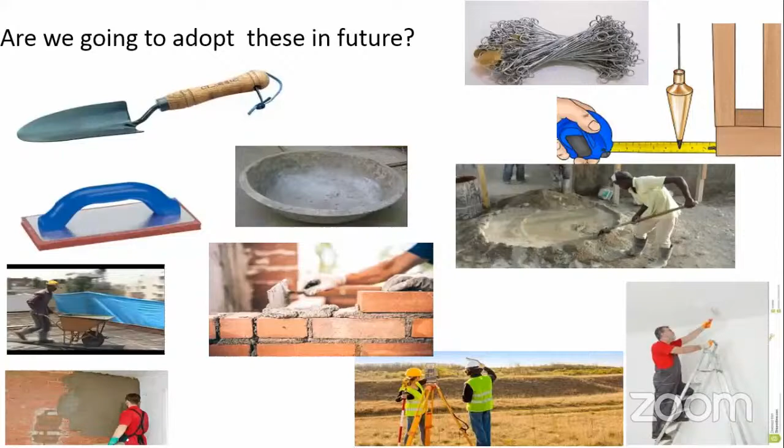If this is the scenario, then what about the construction industry in future? Whether we are going to deal with the same things, like mixing concrete with the pan and bringing the trolley to the site and transporting materials to the site, everything - whether we continue with this traditional method of construction, or we are going to have digitalization. So definitely we have to go with digital construction.

So why we have to go for digital construction is that it is faster and cheaper, because nowadays customer expectation is that everything they need at their place at a very fast rate. So if you are starting a construction by estimating that - normally the problem with the construction industry is the contractor or the consulting civil engineer will tell you this much is the estimate, but definitely we cannot finish the project within that estimation.

Another thing is we will tell them I will complete this project within 6 months, but definitely we are not able to complete it within 6 months. These two are the main drawbacks in the construction industry, for many reasons. But if customers are expecting the project to be completed very fast and also at a cheaper rate, then we have to think of some new technologies. So that is where digital construction has come in.

So it will be faster, cheaper, proactive, collaboration is possible, automation is possible, and real-time communication - all these 5 things can be obtained through digital construction.

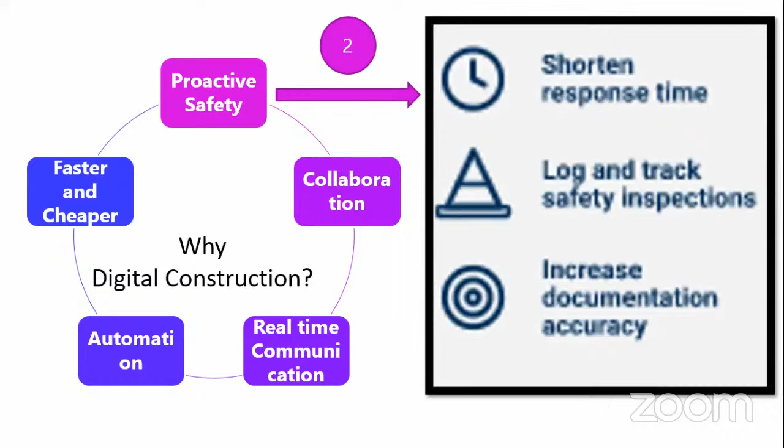And proactive safety, the second one, which will shorten the response time, track safety inspections, and increase documentation accuracy.

Next is collaboration. We can have real-time collaboration digitally. We can punch lists, improve quality control, and collect data. So there's no need of waiting to get a signature from a higher official or immediate higher authority - now digital signature is possible, so that immediately we get approval and can go ahead accordingly.

And then it is automation. So we can automate tasks and actions, update field workers, and track the data, everything. And the 5th one is real-time communication, which means we can communicate very fast.

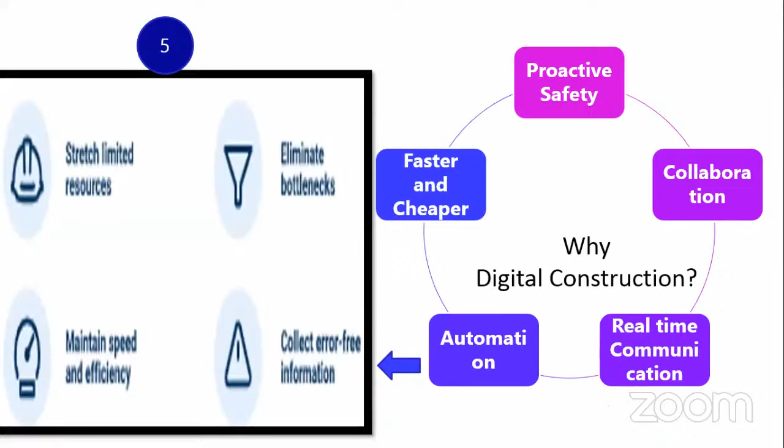And I will explain you in BIM technology. I think already somebody have explained about that, how that team spirit will come and networking is possible with the latest technology. In future slides, I will explain.

So the digital culture has come in all the industries. Only the production and construction industry, it is a slow process, but anyway, we will get it very fast. So the recent technology trends in construction is building information modeling. I think already somebody have done this.

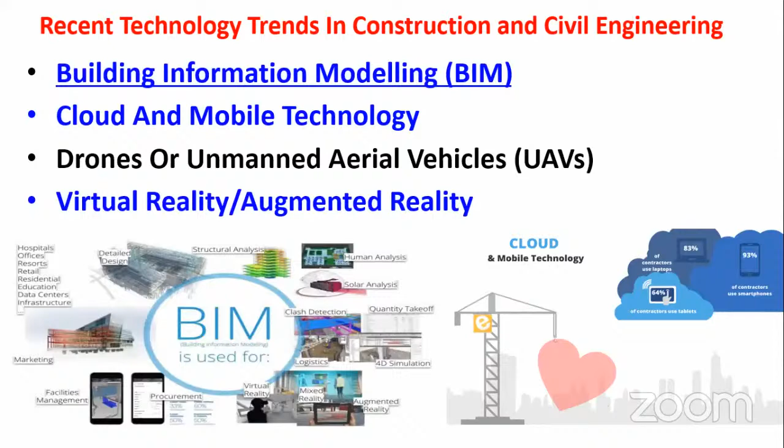And then cloud and mobile technology, drones or unmanned aerial vehicles, virtual reality and augmented reality, 3D printing, artificial intelligence, robotics, exoskeletons.

You know about robotics and all. Now robotics are being used in construction industry, but exoskeleton is wherever there is a risky place where the man can go and work on that. Instead of using the robot, we can use the exoskeleton so that it will be very safe, and that also we can very well use when we are working in risky places.

And the connected job site, this is what I wanted to mention. The job site is entirely connected over internet or any tools, so that wherever, whatever is happening, it will be known to everybody, so that accordingly they will start working on that. So the connected job site is possible in the digital construction world.

So other recent technologies are autonomous vehicles. We know that there are autonomous vehicles already in the US, so without a driver, driverless cars are there. The advantage of having that driverless car is it is also network connected and GPS connected, so that we can track the vehicle. And also without a driver, it will be programmed wherever we want to go, it will drop you there, and we can avoid accidents, everything.

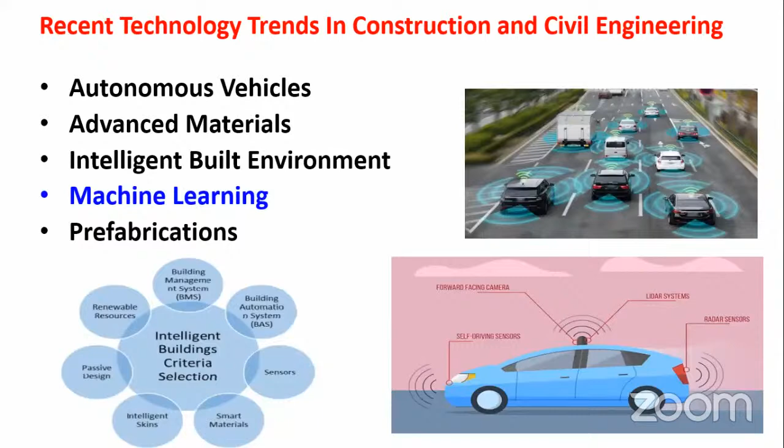Predictive analytics, we can predict how far the project will be completed. Is there any problem going to be there with getting the materials or resources? So by way of using some tools or softwares, we can predict any delay in the process, everything, and accordingly we can work on that.

Then construction software and data ecosystem, self-healing, and the use of GPS. This scanning solution, you can see here this particular picture. This will scan the entire building, the entire layout of the building, entire land of the building. So by scanning this, we can get an idea about the construction scenario, how it is happening. Is there any transport problems? Everything can be analyzed previously, and accordingly we can do the project.

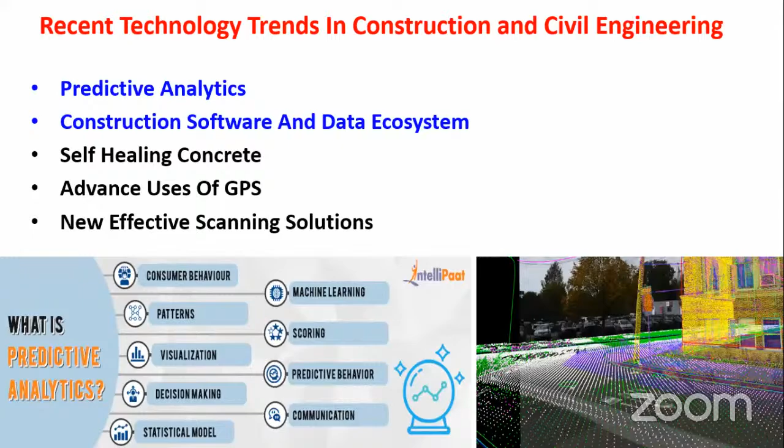So this is also possible with the latest 5G technology and the latest tools.

And now let us come to what are all the technologies used in construction industry to make it digital. Big data. Big data is the main thing that we can have the information of the data to improve the efficiency and to increase the safety.

And artificial intelligence and machine learning, we are giving the intelligence to a robot artificially. By that way, we can improve the efficiency and productivity. 30% of the productivity can be increased.

And then the third one is IoT. By connecting the objects and devices and construction field supervisors, the entire construction site can be connected through internet so that we will get the information then and there.

Robotics and drones, as I mentioned, we can use robots and drones for the supervision of construction and also for different quality of the work and improving speed of the work.

5G broadband is very much important. Once 5G technology comes to India, everything can be done at a very fast rate at construction sites. For example, if I'm sending a plan, a 3D view, or an AR/VR project to a site engineer, since this is big data with high MB, downloading will take a lot of time on 3G or 4G. But when 5G comes, we can get lots of data, images, maps, drawings, plans, everything to the site at a very fast rate, so we can complete tasks at quicker installation time because of greater flexibility. This 5G will increase productivity by more than 27 times.

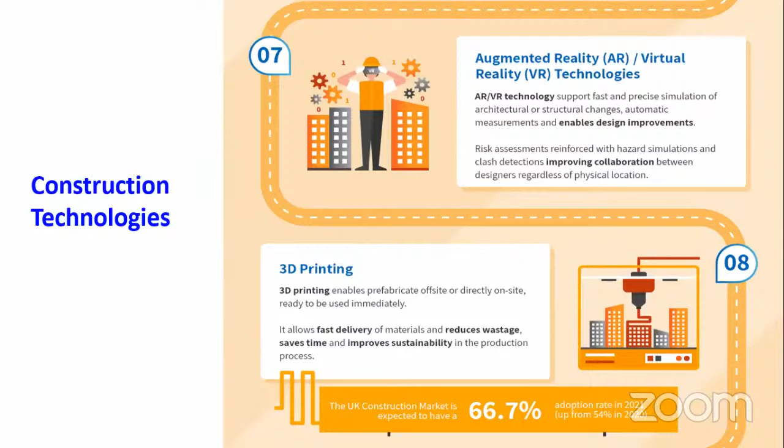Then 3D printing - instead of using laborers and other things, a printer can print the building in a 3-dimensional way, which is very fast and reduces wastage. No need for laborers, only very minimal skilled persons are enough. It saves time also.

So these are all the cutting edge technologies we are going to discuss today. Only these technologies are going to come very fast in the construction industry.

For surveying, drones are going to be used - already they are in use. But in future, other instruments like theodolite or total station will be replaced, and the usage of drones will become very large.

Then for planning, AR and VR; for construction, 3D printing; for smart homes, IoT; for machine learning, robots; and for execution, modular construction are going to be used.

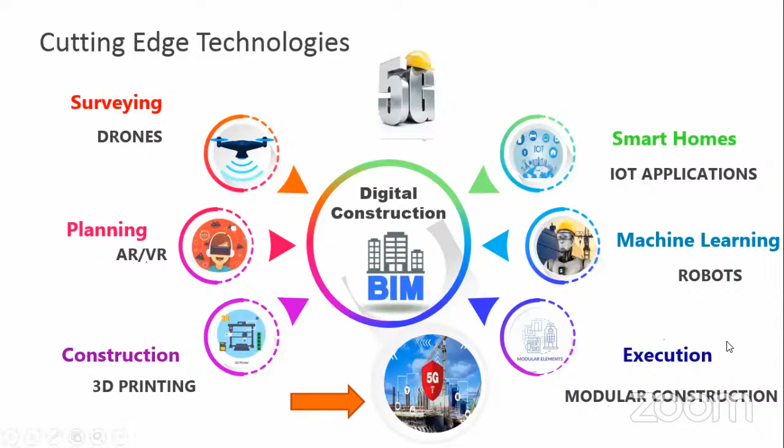So these are all 6 technologies I am going to explain in a short way. If needed, each and every technology will take one day session - at least a 2 hour session is required for explaining each technology in detail. But for training, if you want to become an expert in these technologies, we can have a 1 or 2 week program in each and every technology.

Already in Sona College, Department of Civil Engineering, we have all these technologies and we are imparting these skills to our students, and also we are doing a lot of projects.

So virtual reality, modular construction, 3D printing, drones, Internet of Things, and artificial intelligence - these technologies are going to be the paradigm shift in the construction industry. In the very near future, within 5 years, all these technologies are going to be there in the construction industry, which will bring the construction field to the limelight.

For example, a civil engineer - normally nowadays, the present scenario is that millennial youngsters and students are not interested in taking up the civil engineering field, because they have to be at the site under the sun and work very hard, whereas the IT engineer works in an AC room with computers.

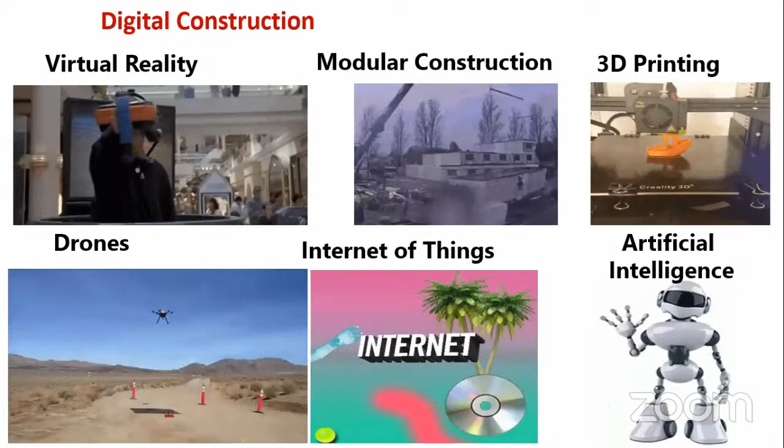The same thing can be done with the civil engineering field also. You can adopt everything through technologies, tools and software, with no need to go to the site every day. So this is what the scenario is going to be.

And first, let us see modular construction. We know about prefabricated construction, where each and every part of a building is assembled there - for example, wall, staircase, beam, column, slab, like that. But here it is a module - it is fabricated in a factory and brought to the site.

Normally now people's mindset is they want everything ready-made, so they are not ready to wait for days or months for anything. For example, even for jewelries, earlier we would go to a goldsmith, select the design, and they would prepare the jewelry model, taking 1 or 2 months. But now it is not the scenario.

We go to the jewelry shop, we select whatever design, and if it is okay for me, then I will get it. The same scenario is expected in the construction industry also.

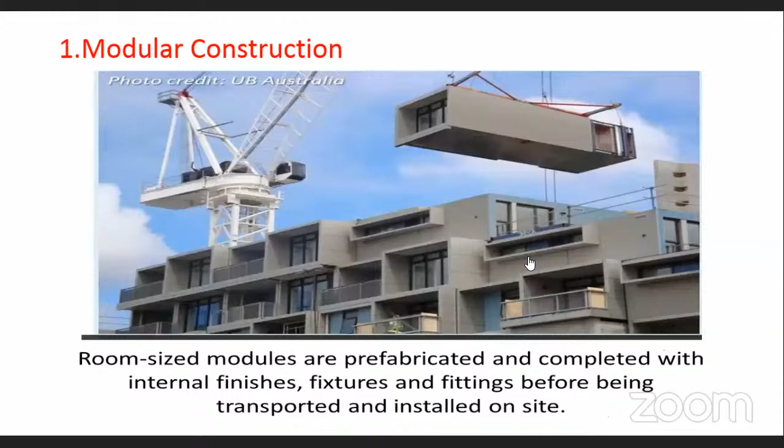Can't see the video. Excuse me, we can't see the video. You can't see the video. No. I don't know why, what is the reason? Is it Zoom? Normally in Zoom there is a problem with this video. I will do one thing, okay fine, instead of a hyperlink shall I? Or at the end I will show some videos. Okay fine, ma'am.

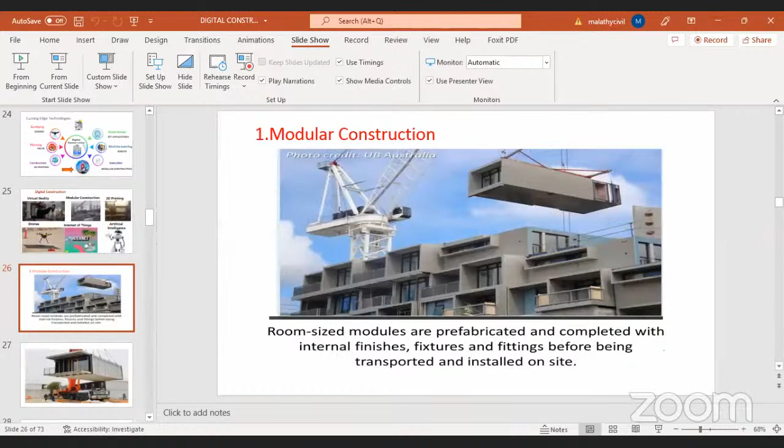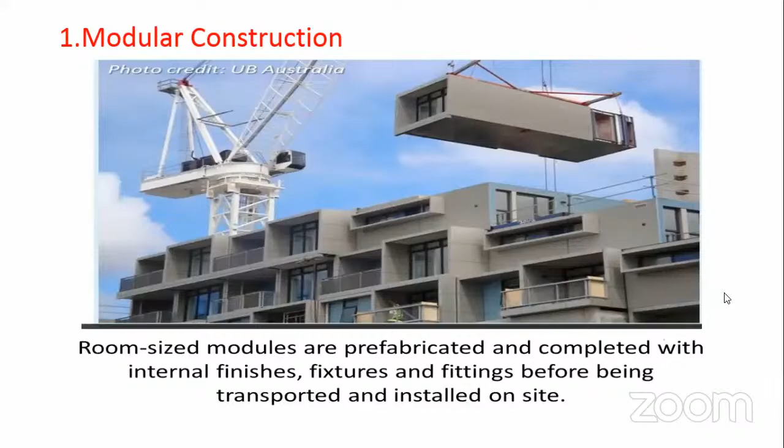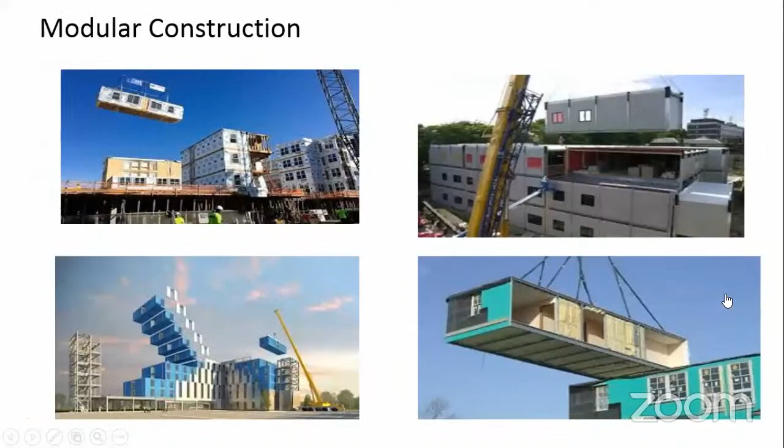So this is also one video I wanted to show you, how it looks like for one complete office room. They have completed everything with the attached bathroom, tiles fixed, plumbing work, electrical work, doors, windows, everything completed and brought to the site. So these are all different modular constructions.

The second technology is virtual reality and augmented reality. As I mentioned, there are two things, one is AR, another is VR. In augmented reality, you can see the drawing and that two-dimensional thing will be shown as a three-dimensional building by having an app in your mobile phone or software in your laptop, so that we can visualize the two-dimensional plan as a completed building, how it looks like.

For example, you might have seen some films, Katti film, Vijay film. I wanted to show that video but I could not now, at the end I will show it to you. Even we civil engineers with more experience could not visualize the two-dimensional plan. Reading a drawing itself is an art, so from the drawing we have to understand what the plan is and how the room looks like, everything.

But by using this tool or app of augmented reality, you can see here through the tablet or mobile phone, one can visualize the object, how it looks like. In the plan you can see the two-dimensional drawing, but when it is viewed through the mobile phone with that app, you can see it as an object. So that is what augmented reality is.

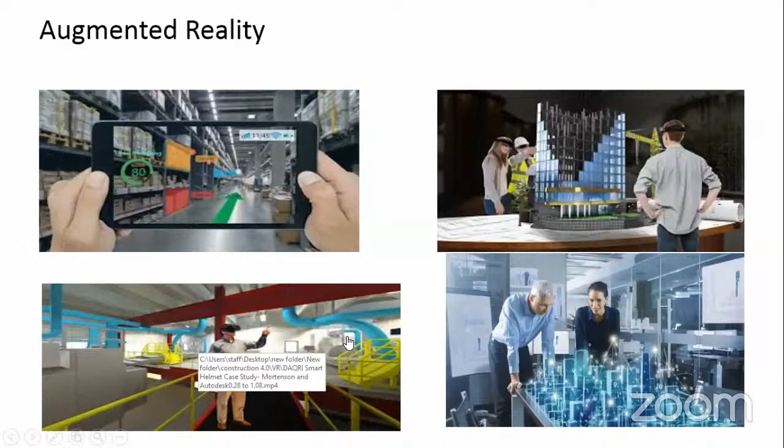And this is about how the flyover project can be done. That will be shown to the higher authority virtually, so that they will understand better.

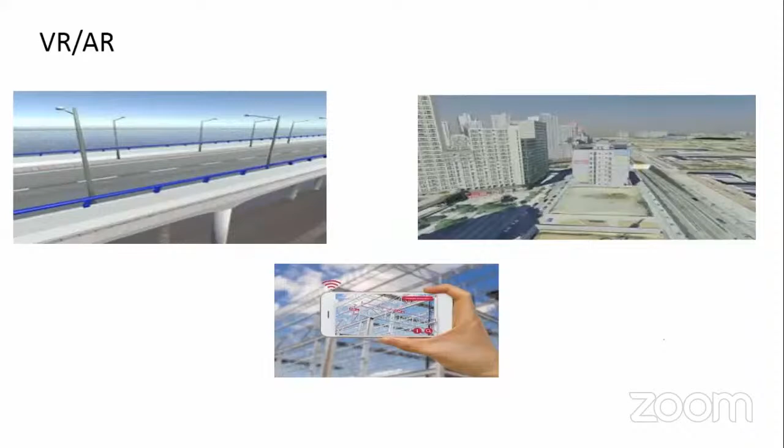The third technology is the drone. Drone is nothing but an unmanned aerial vehicle. There is one separate session on the 28th where I am going to handle drones in construction.

In drones, how it is transforming the industry is, the drone can be made to fly for a building from top to bottom, and from your office you can view what is happening there in the construction industry.

What this drone will do is take some images and videos, and it will simultaneously reach you in your office, through tablet, laptop, or mobile phone, and you can view it.

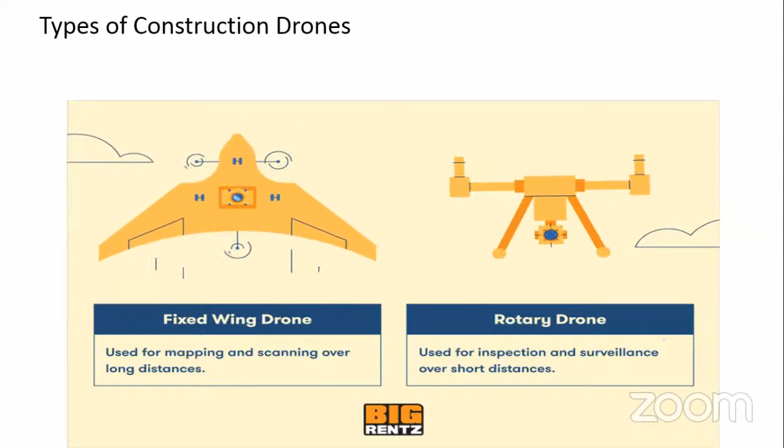So there are two types of drones. I am going to explain the different types of drones and how they are used in the construction industry for various purposes in the next session. This is a fixed wing drone, and another one is a rotary drone.

So the key features are: there is a GPS to monitor longitude, latitude, and elevation points, and there is a camera, which is the main part of a drone, capable of shooting high resolution photos and time lapse videos. There is also a thermal sensor - whatever sensor we want according to the scenario, we can add it to the drone. The thermal sensor is to take aerial heat and thermal images, and there is also software so that it can be manipulated.

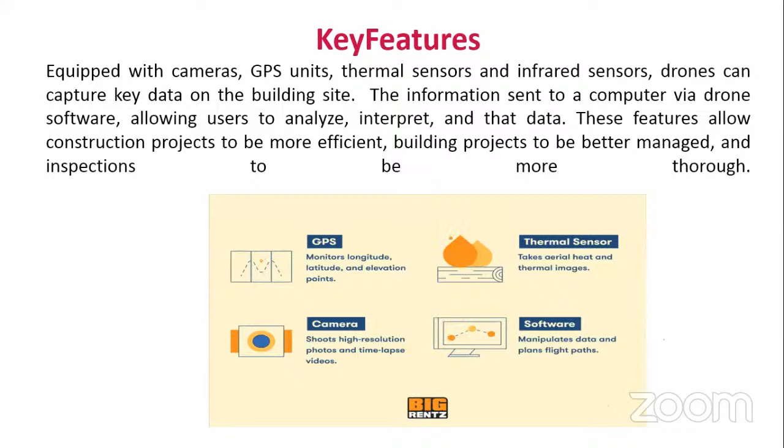The purpose of using a drone is only to take images, that's it. Wherever you give a path, it will go and take images and videos and submit them to us. From the image and video, it is our part to interpret the results by using some software.

And this is topographic mapping and land survey, which we can do at a very fast rate. It can be done within 15 to 30 minutes.

Now, by using a drone, we have done a project in Karnataka, Chikkabalapur forest. It is 100 acres of forest. Normally a human being cannot go there, it is a very risky place. By using a drone, we completed that 100 acres of land survey within a day - that's how fast surveying can be done.

And even in inaccessible places, where we cannot go and take a theodolite or total station, we can very well use these drones.

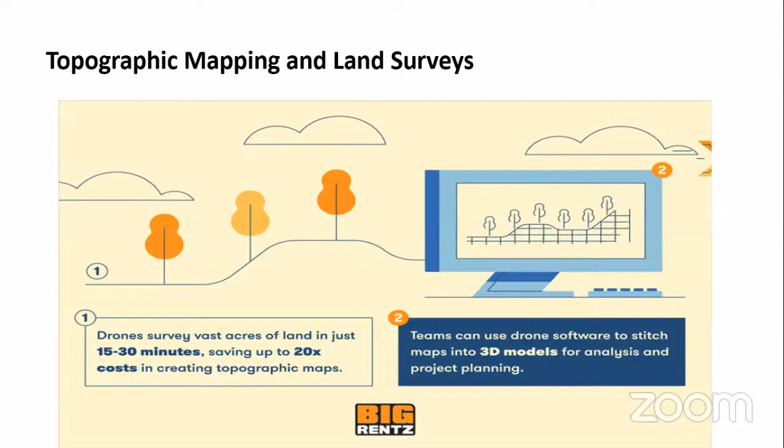For equipment tracking and remote monitoring of the site, we can get progress reports. Every day when you take images, you get the day-to-day progress of construction, and also at the end of a week, for billing and measurements, we can very well use the drones.

And for security surveillance, whether any unauthorized person is on the site, that can be detected by using this drone. Also for personnel safety - for example, for a 200 feet building, a human being cannot go and inspect it at that height, it is very risky.

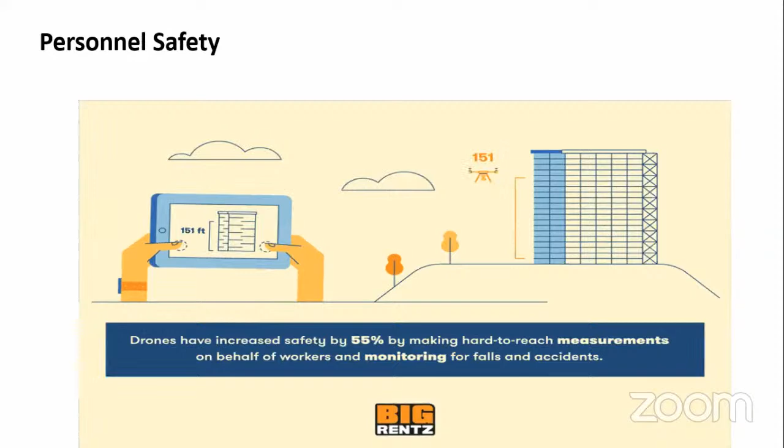We can very well use drones for structural inspection and photography—checking if there is any crack in the building, or after completing concreting work, whether there is any flaw in the concrete.

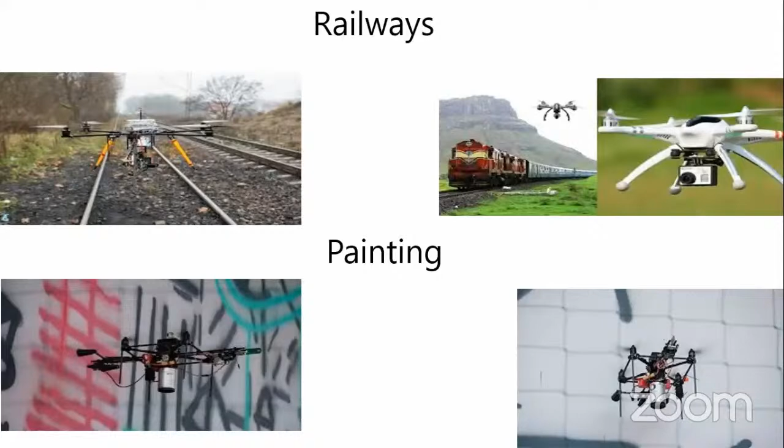And for railway alignment and painting, everywhere we can use these drones, and it will give you very fast results. Compared to the traditional way of doing things, using drones can consume only 10% of the time. Crack detection, road repair—all these things I will explain in the next session in detail.

And the fourth technology is 3D printing technology. Normally when we want to take a printout, we get a 2D print. Like that, 3D printing is also possible by having some objects.

For jewelry, they make it using 3D printing so that we can avoid the wastage of making jewels, because it is additive manufacturing, not destructive manufacturing.

The difference between destructive and additive manufacturing is, for example, if I want to make a matchstick: cutting a tree and reducing it to a stick is destructive technology. Instead, if I take the pulp of the wood and make the stick layer by layer, that is additive manufacturing.

So for making jewelry, gold is taken and from that they make the jewelry, and there you get a lot of wastage. Normally when we purchase jewelry, they add 25% wastage charge. But with 3D printed jewelry, we can avoid that wastage. We only pay the jewelry owner for the gold plus the making charge—that's it. Unnecessarily we should not pay an extra 25% wastage.

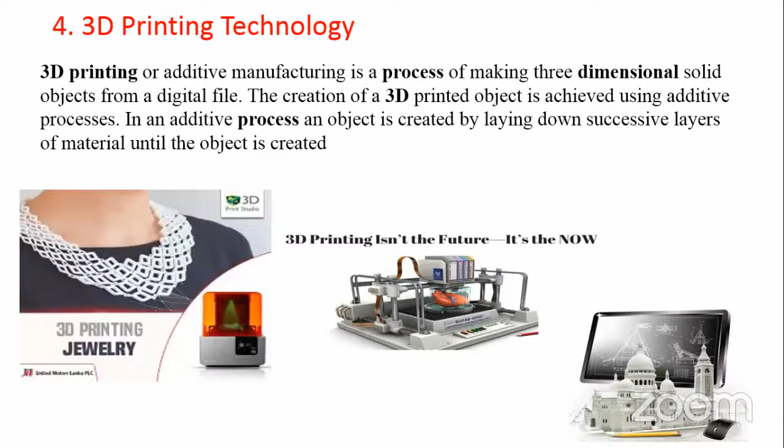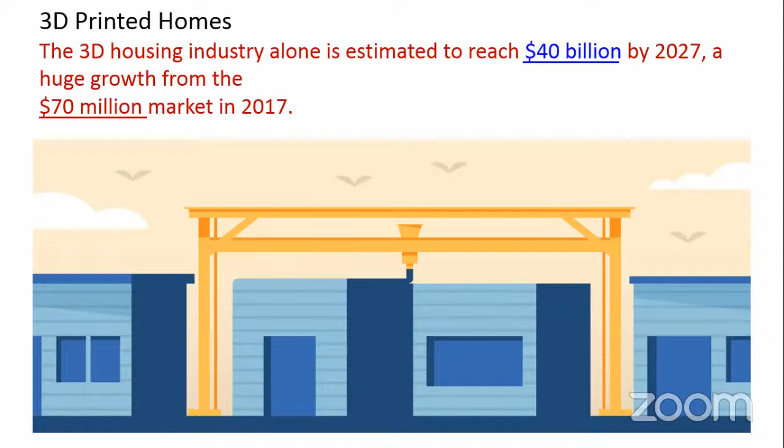Like that, for houses and buildings, we can adopt 3D printing. It is an additive manufacturing process producing a three-dimensional solid object using a 3D printer. These 3D printed homes are expected to reach about $40 billion by 2027—there will be huge growth, and this is the future of housing.

If we want hundreds of buildings of the same nature, we can adopt this 3D printer so that it is very fast—about 2,000 square feet of building can be done in a day itself. Within a day, we can complete the project.

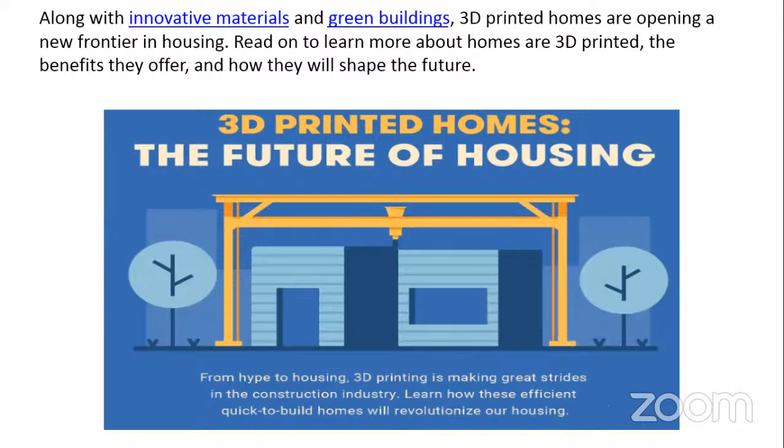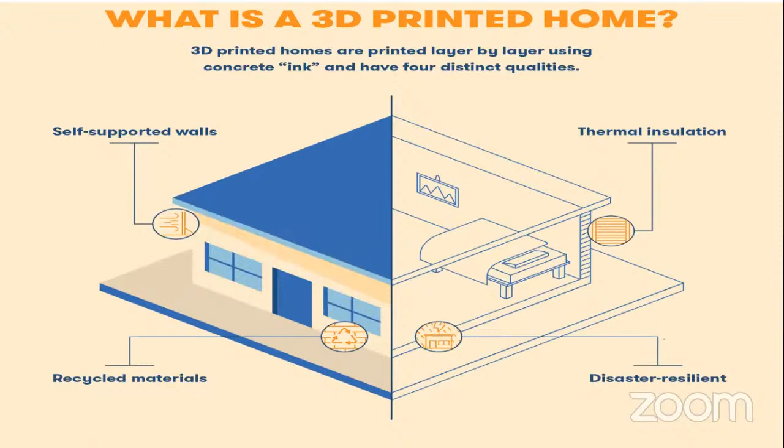What is expected is a self-supported wall using some recycled materials, with thermal insulation, and it is disaster resilient also. But how can it be done?

Once it is given to the printer, it will print accordingly. For that, we have to mix the concrete and load it into the printer to start the process. This printer has an extruder, through which the concrete mix flows and creates the shapes layer by layer. Because it is additive manufacturing, it is stacked layer by layer, and then the pattern of the walls will come. Then we add the doors, windows and roofs manually.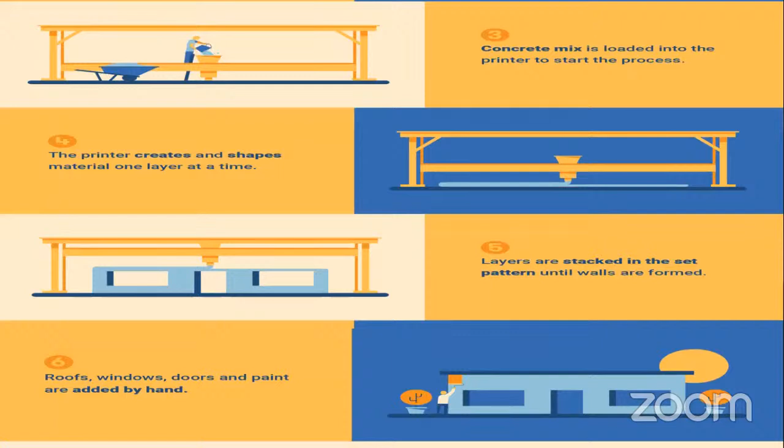I will show a video at the end of how 3D printing is being done. Then the fifth technology is Internet of Things, IoT.

Internet of Things means the things are connected. Through the cloud, you will get the information. So the objects or devices can be connected. There will be a sensor, and from the sensor we will get the information.

For example, in a smart home, there is an AC. Suppose once you come out of the house and think you did not stop the AC or switch off the fan, from your mobile itself you can switch off or switch on the fan. The AC also you can switch on before entering the house from your car or your mobile. You can operate the things - that is what Internet of Things is.

This IoT, Internet of Things technology, is being used at the construction site as well as in smart homes. At the site, all the things are well connected so that information, or activating some of the things, can be done from your place itself. No need to go there and do that.

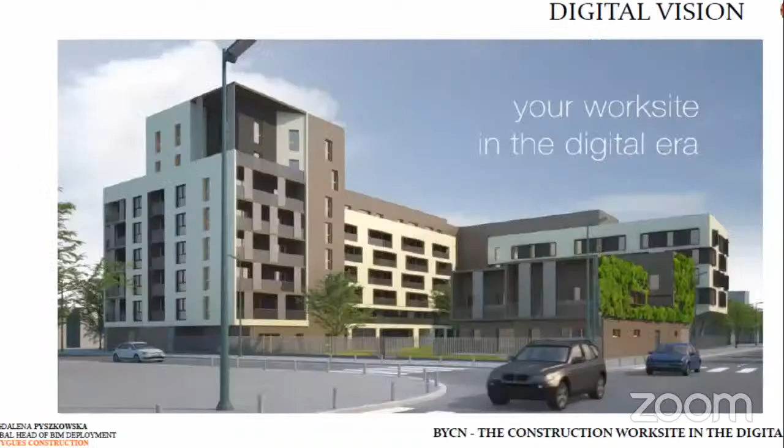This is what the future digital vision is going to be. Your work site in the digital era is going to be like this - nobody will know where the construction work is going on. There will be no disturbances, no dirty things, and no pollution happening in buildings under construction, and the neighbor may not know whether construction is going on there or not. That is the scenario in the digital era, without any delay, without any disturbance.

We can complete our construction project. Nowadays, the very big problems in the construction industry are delay in progress, pollution, and disturbing the neighbor with noise pollution. All these things will go away because of this digital era and BIM adoption.

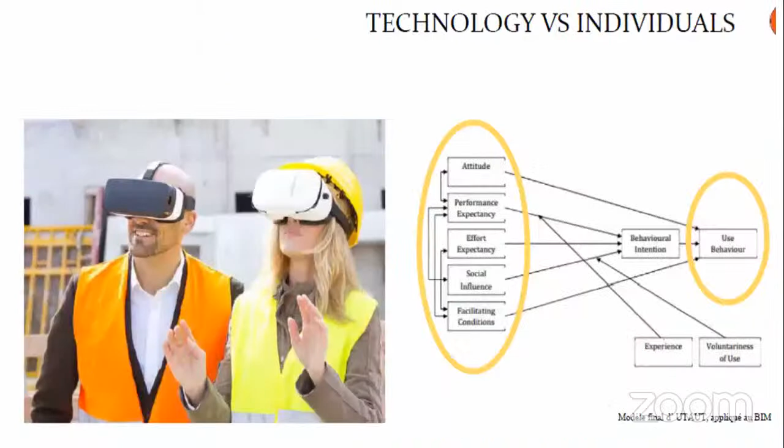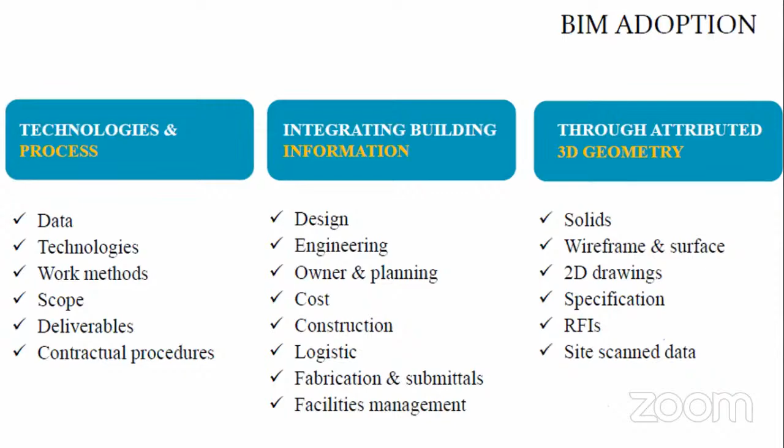Earlier we had to wait a day, two days, or a week for approval from the next level. But by adopting digital technology, all teams and each member are getting connected, so information and approval will be very fast. This is the scenario we follow through BIM technology, integrating building information through attributed 3D geometry.

The last technology is machine learning or artificial intelligence. Here we give intelligence to machines and train them. Once trained, the project will be done automatically by the robots.

The purpose of this is, as mentioned, being a human being, efficiency will vary person to person. There are also pandemic situations, health issues, strikes, and laborers may not come. We may feel today we have to complete an activity, but the labor will not come. So a lot of issues we are facing.

But through machine learning, we will give them a particular skill, and that will be done by the robots continuously, so it will be efficient and very fast.

These are some applications of artificial intelligence in the construction industry: site layout. Even a drone is a robot, it is a machine learning process only. Site layout and alignment, planning and scheduling, cost and duration estimation, contract management - all these are possible using artificial intelligence in the construction industry.

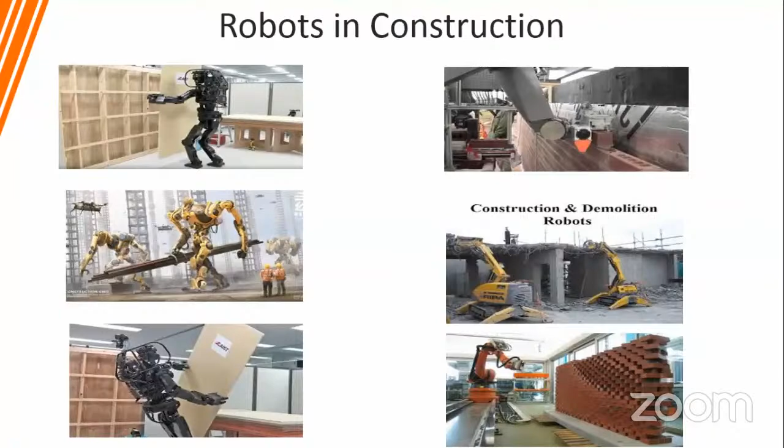Some part of the work humans cannot do, so we use the robot. Some part of the work robots cannot do, and human intervention or human knowledge is needed. In such a case, both robots and human beings can act together to complete the task - that is called cobots.

So the growth of digital construction is going to be like this: year on year, 50% growth in BIM, 75% growth in modular construction, 99% in prefabrication, 70% in 3D printing, 243% in artificial intelligence, and 118% in automation.

So there are a lot of opportunities and scope for utilizing digital construction and these technologies. There is going to be drastic growth in these technologies in the construction industry.

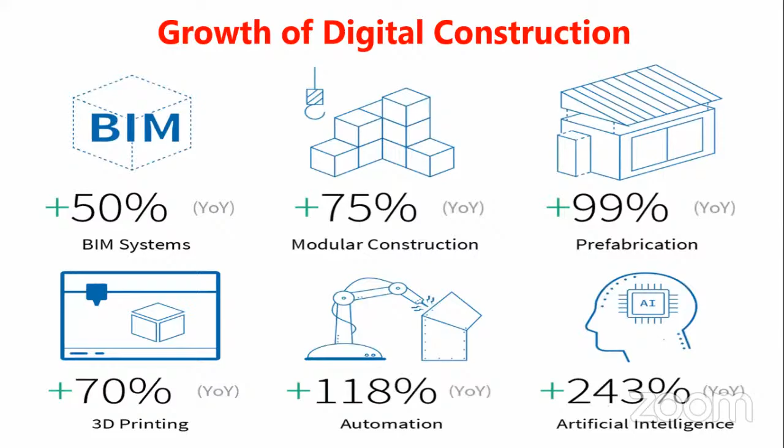Digital roads are also possible - solar powered roads, smart roads connected by autonomous vehicles, and electric powered vehicles. For charging electrical vehicles, priority is going to be given by adopting these digital technologies, and the roads can glow during night time. All these things can be done in road construction also using digital technologies.

Construction companies are still in the early stage of digital construction. It is very slow in adopting digitalization. Almost 60% of construction companies worldwide are just starting their digital journey, DX, digitalization journey, and it is very slow, but I hope it will pick up very fast in future years. In another 5 years, digitalization in construction is going to be there completely.

That is in the hands of the millennial students and budding civil engineers who are going to complete their civil engineering program in another 2-3 years. They have to make the change, they have to be the trendsetters for adopting these latest technologies in the construction industry. There are 5 key challenges, digital deadlocks, that will block digital construction, like innovation not being there, and no platform.

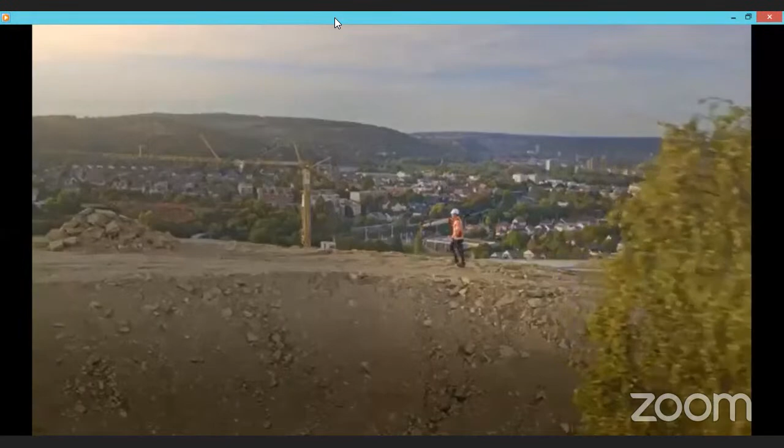Now can you see, sir? Yes, sir, yes madam, we are able to see the movement of the vehicle, we are able to, yeah.

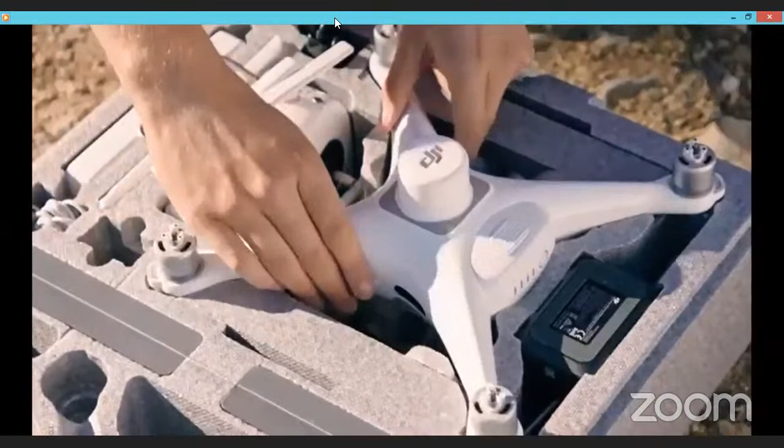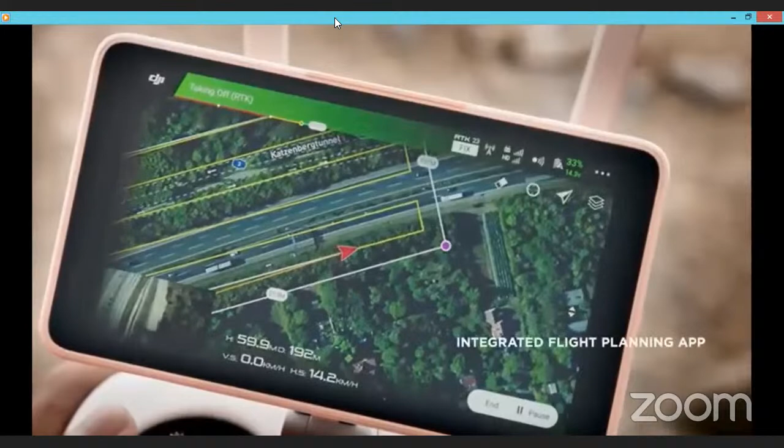This is the tab or platform by which we can get simultaneously all the images taken by the drone. We have to fix the latitude, longitude and give the path to the drone. As per the given path, it will fly, and once the purpose is over, it will come back to the owner.

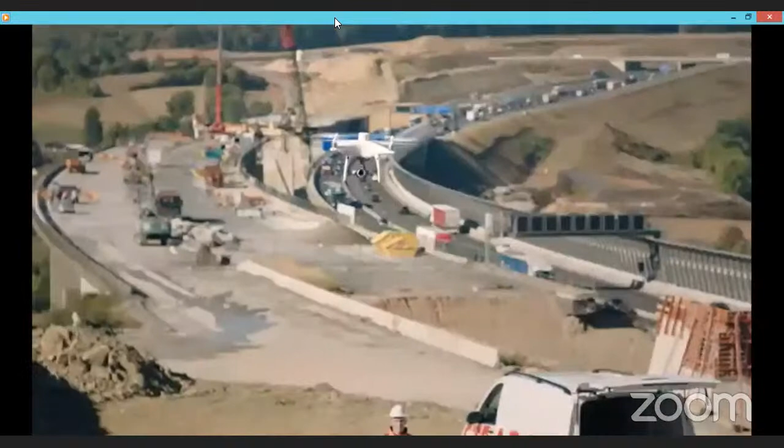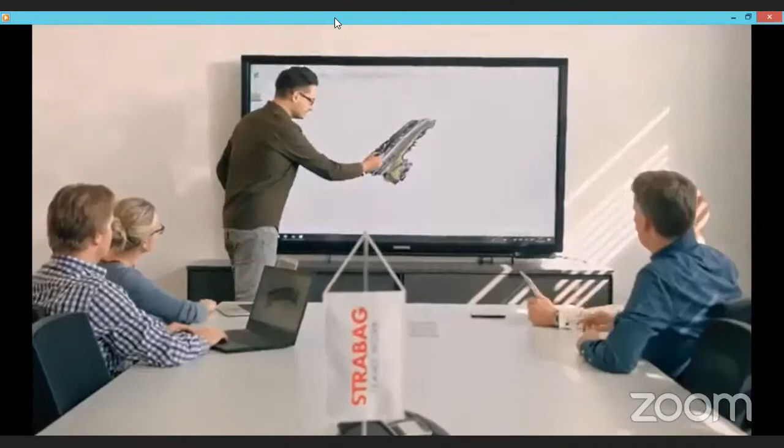It takes images, and simultaneously we can view where it is flying. According to the path, it will fly and take images and videos with high accuracy, then come back. Simultaneously we can get the images.

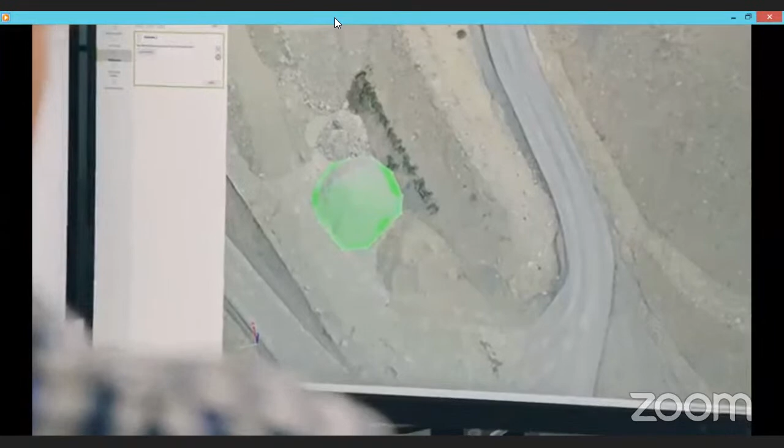We have to upload the details on-site, and accordingly the images will be downloaded, and using software we can interpret the results and get the output. This is how that output is coming.

Next I will show one for AR VR, and then one for 3D printing.

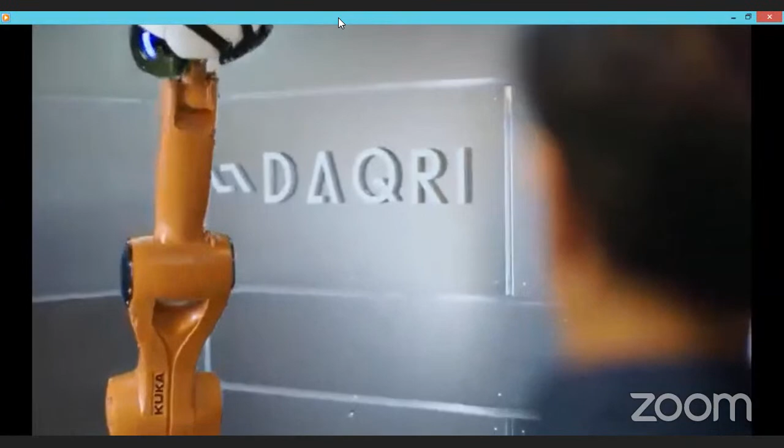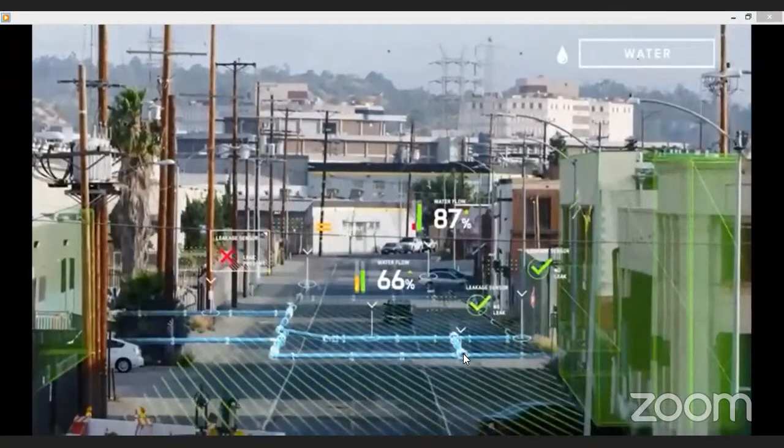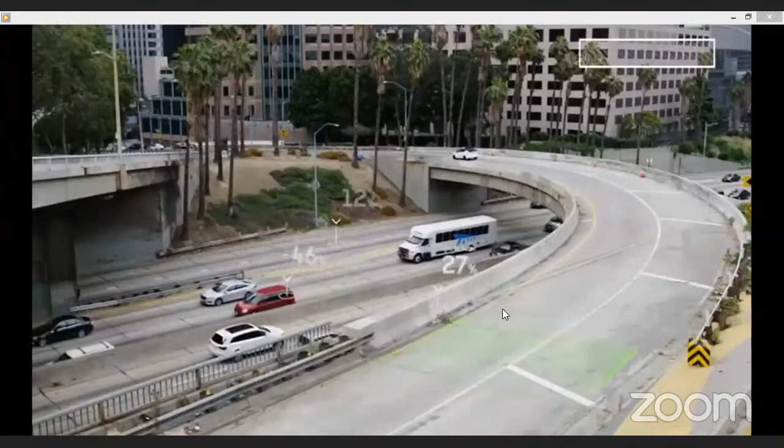This is the helmet we have to wear for VR. Through the helmet, virtually we can see the total place where the building is going to come. This is the city project. By augmented reality, we will get the 3D model of the building, using a gadget like glasses. How the construction will look after completion of this flyover can be viewed virtually by wearing the glasses and helmet.

Recently in Bangalore, at the ICA program, one stall was put up for this. I have used this helmet and saw the entire planned house, just for information. With this helmet, one can view the building and see where the electrical lines and pipelines are going. According to the input given to the software, inserted in the gadget, we get the information.

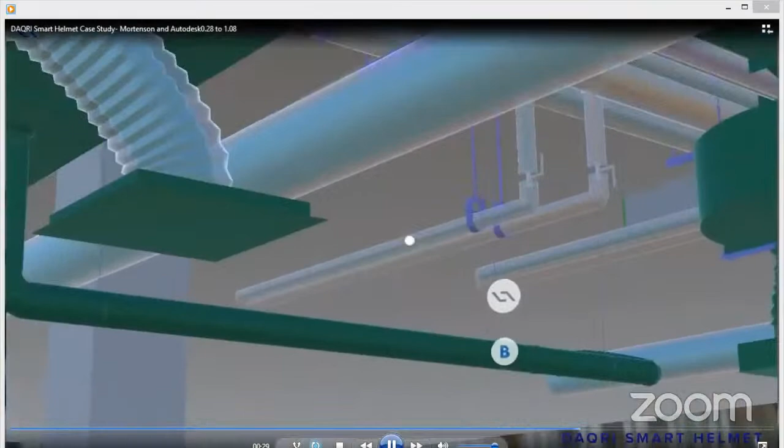See here, he is wearing the helmet and sees the pipelines and ducts going on the building. It is not there physically, but virtually they are shown as per the plan, to see how it looks like. See the ducts, how they go as per the plan. Yes, the lights, pipelines, ducts, everything we could visualize virtually.

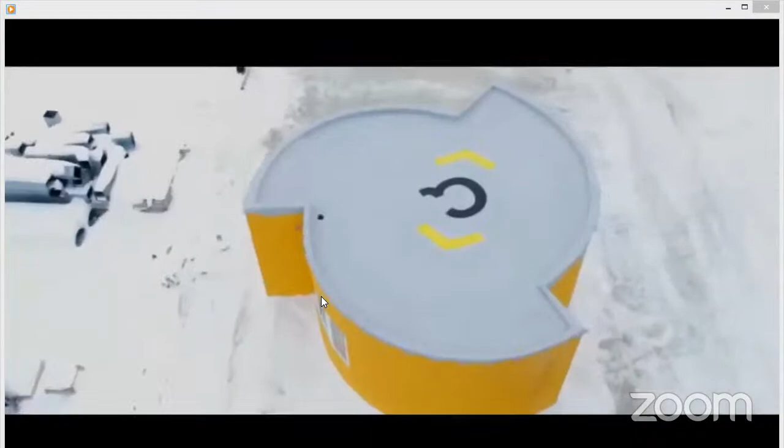Next I will show just one video about a 3D printed home and how they are constructing it. This house was built within 24 hours with all furniture and other things. As I mentioned, this is additive manufacturing, where layer by layer the walls are constructed.